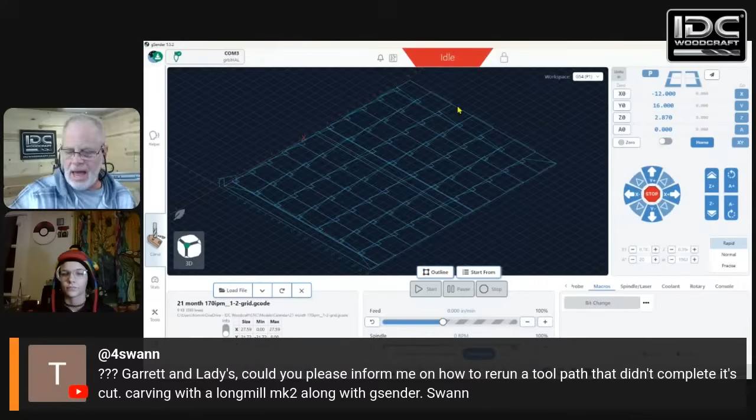It's not showing right, let's see if I can hit connect. Okay, reset. I'm just going to start the job and stop it if I can get the alarm to reset - I've been away so the machine's not... probably has to. Maybe I can get it. Anyway, if it kicks out on you, okay, there we go.

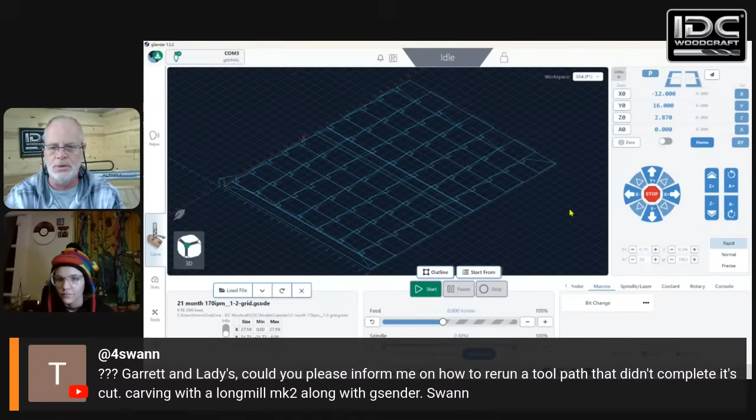If it kicks out on you, like a power drop or something like that, it's recording everything you're doing. There's this little button right above your start button that says 'start from.' You select that, and this window pops up saying the machine stopped at line number whatever, and it's going to say resume the job at line - it gives a recommendation about 10 lines before. You hit start from that line, and it'll turn the spindle on, position itself over that spot, come down, and start resuming from that line. It's a really cool feature in the GSender control software. So that's how you do it.

Okay Swan, I hope that helped you out. All right.

Tim, anyone out here have any experience with the WeCreate 45W? Good, bad? Would it just be a hobby, not a business machine?

Yeah, I don't know what WeCreate is. Maybe 45W, I guess that's 45 watt. I'm not sure if that's a machine or what, I have to look that up. Let's see, WeCreate 45W... let's see, that's a laser.

Okay, yeah, so anybody out there that works with a laser, maybe you can answer that question - is it a good laser, bad laser, what? Would it just be for a hobby or what? I can bring that up and take a quick look at it, and I can tell you my thoughts, or other people can share their thoughts on it. Actually, it looks like a fairly decent enclosed machine.

I have to move this to my other window here. Yeah, all right, there we go - this laser right here. So this looks like it's one of those... what was that other laser that was out there before? This is more of a home machine, I think. You've probably seen them a few years ago, I forget what it was called, but they were advertising it on the kitchen counter. It's a laser, which is not a good idea because it's going to burn and smoke - burns the wood.

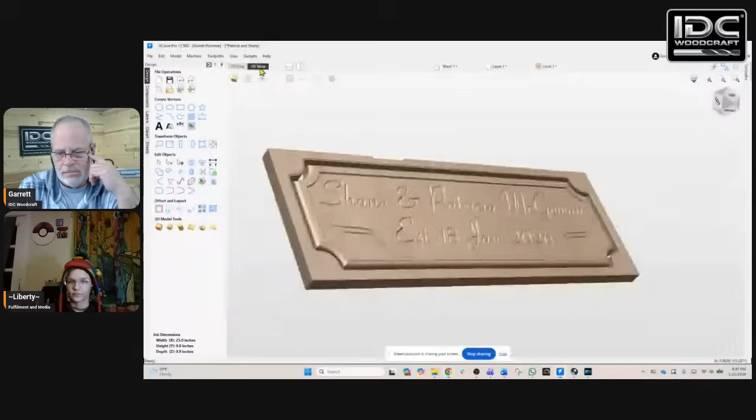This wedding project, let me show this thing right here. Everybody's here. So I started off with just, I'm going to make a wedding project, and what am I going to do? Okay, I'll just do an established sign. Shane and Patricia McGowan - that actually looks like a C, but it's a G with that font.

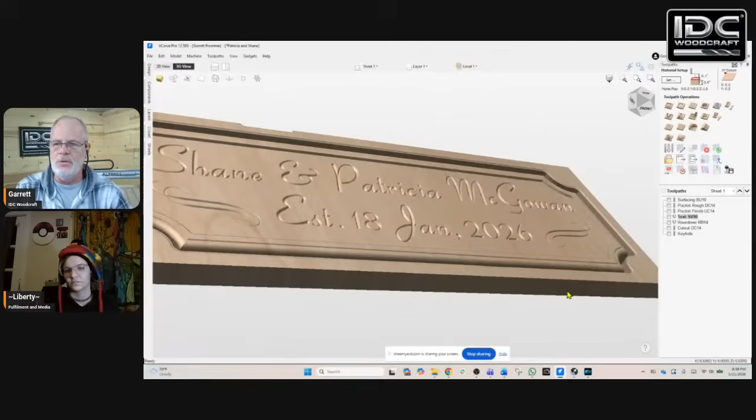And then I just went with the shape. It's such a basic shape that VECTRIC has, and I used a roundover bit as a beading toolpath. Didn't just round it over, I actually ran it down deeper, so it created that raised edge there. That actually gave it a little framing shot. I talk about how to do a beading cut like that in my video, how to use a roundover bit, so we'll link that because that adds a lot more accent to it.

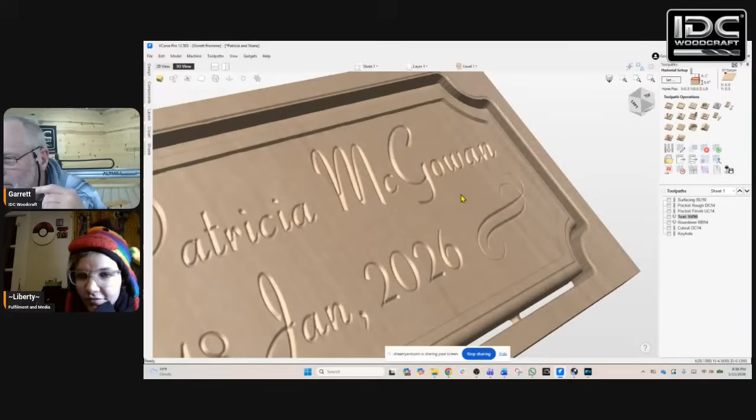All right, I love beading, I love the rounded bits. Yeah, the roundover bits, they're the ones that take your whole project and just step it up a notch, right? It adds all the elegance to it. I did it with this instead of a squared off board, and just ran a 1/8 roundover bit right around it and took care of it. Just round it out, it just takes it to a different level.

My worst is finding good wood to make my millions of ideas. Yep, right there with you, man. Yeah, well, just finding the right depth of cut for each design. Oh my goodness, yes, I'm in that struggle right now.

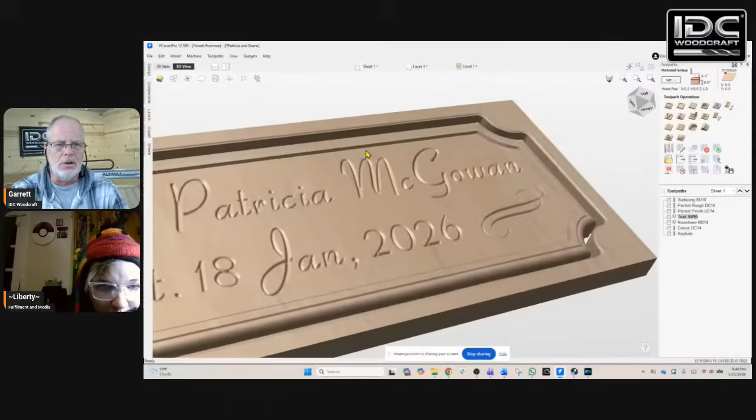Yeah, if you go too far you can actually make a project look bad if you go too deep in some things. That was the case with this project. It was like, how deep do I go? And that's what I like about the rendering, because then I can just kind of look at it and see what it's going to look like, and then I try to picture it in the real world in my head.

And then I have a love-hate relationship with the rendering, because right now it's not changing no matter what I do, and I want it to change, or I want to not see it so I can ignore the issue until it's carved out. I'm like, it's still there, it's still there. But it's great though, because I didn't have to carve it out a million times to see that.

Greg from STL dropped in. Hey Greg. Yeah, Ellen said she has a lot of projects waiting in line. Yep, and you can't make them fast enough.

No, that's why me and Adam are setting out a schedule, like okay, this one's going to be this size of a project, this one's going to be this size of a project. How can we kind of spread out the bigger ones, the longer ones, that kind of thing? I had to dial it back. I said okay, I'm going to make very few personal projects and just do it for videos, because that was locking me up too.

Mark said it before, project paralysis. We'll have to start that as a legal medical term in CNC. We'll call it project paralysis dysfunction, or what, disorder? Project paralysis disorder.

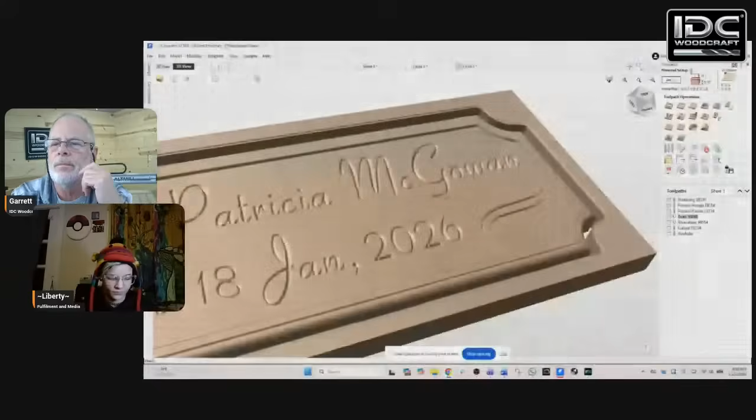So let me bring up VECTRIC. I'm going to open up a new window, a new VECTRIC. Just give me a second while I open this one up. Okay, wait a minute, where are you? There it is, okay, it's on my other screen.

All right, so I'm just going to set up a quick project here. First of all, when it comes to the IDC Woodcraft, every keyhole bit, you've got to know the dimensions of the keyhole bit or have the data provided to you. So first, let me show you what a keyhole bit is. We're going to go to the IDC Woodcraft website for those that don't know.

Okay, come on, open up. There we go. So a keyhole bit makes these kind of slots for you to hang your projects on, or so you can hang them on the wall. The keyhole bit has that shape where it basically drills down on the part and then cuts across. It's a two diameter cutting tool. So what's important is to know the height of the big diameter and the depth you're going to go in the small diameter.

So with the IDC Woodcraft tool, this one here, the way you set that up is, I'm just going to draw a line. We're going to start a line. Let's just say we're going to put my keyhole right in the middle of the project here. I'm going to click the start button, start that line. I'm going to come over to whatever distance I want it. If I want it 2 inches, I'll type in 2 and enter. And now I've, oops, didn't do it. Let me get that again. 2, enter. What's the matter with you?

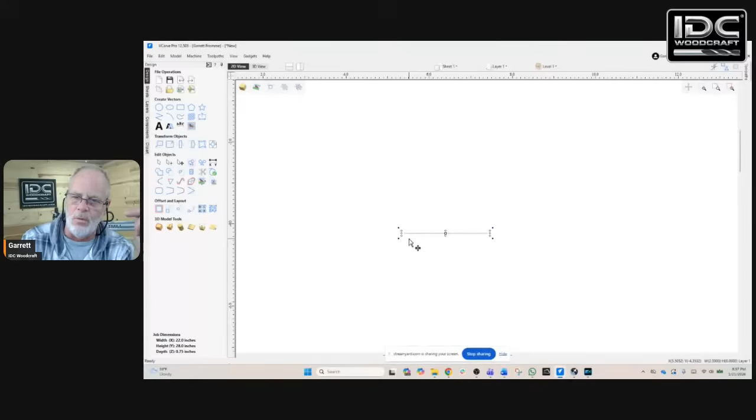It's not taking it. All right, I'll just click. First I want to find out why it's not doing that. I'm going to go back. Oh, I must not have that thing turned on. Okay, so I'm going to go 2 and enter. So there we go. Then what you're going to do is double back that line to the start point. So I click right there, and then I can escape. And what that is, you have a line that's starting in one spot, moves over to the other spot, and then comes back to that spot.

And then in the database, let's go find the database. Actually, I'm going to have to change something a little bit on that. So I got it set up as an end mill, but I might change it to a form tool. But for now, I'm going to leave it as an end mill. Right now, the IDC Woodcraft keyhole bit, the pass depth is set in the database.

So the pass depth is 0.375 of an inch. Basically, all I have to do is open this up and say, okay, this is 0.375 of an inch. So I'm going to select that bit, I'm going to do a profile toolpath. I've selected that, and the first thing I'm going to do is set my start depth to whatever it is, it's 0. Then my cut depth is going to be 0.375. So basically it says there's one pass right there. And what that's doing is telling me, okay, that's the depth we're going, the full depth of that keyhole bit, which is what you want to do.

And then you make sure you're on the line, and it's going to use the rest of the data, which is 30 inches per minute. It's going to come all the way down, then move across and come back out. So it's actually quick and easy, but you do it in a profile toolpath and set your depth to that 0.375, or use the database. It's 30 inches per minute, and you'll be set up that way. So it's a good question. I do have a video on a keyhole bit, so it's an older video.

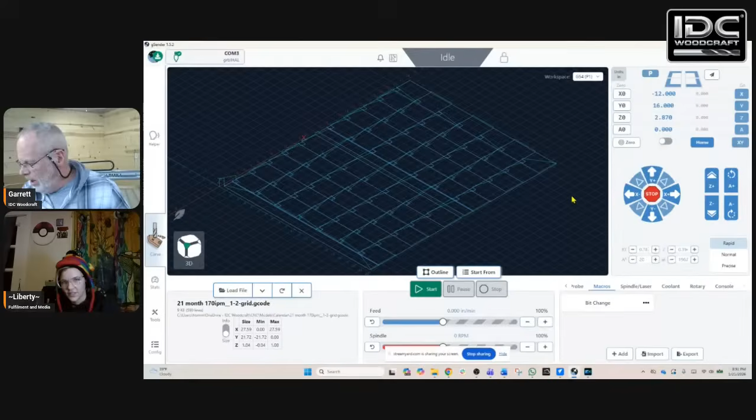Next, how do you use the macro button in GSender? Oh boy, I love the macro. That's probably another one people sometimes get hung up on, what does macro mean? We'll do a couple more and then we'll have to bug out, I figured we could try and finish these last two. Macro is basically a couple of short programs you create that can do whatever you want outside of its normal running.

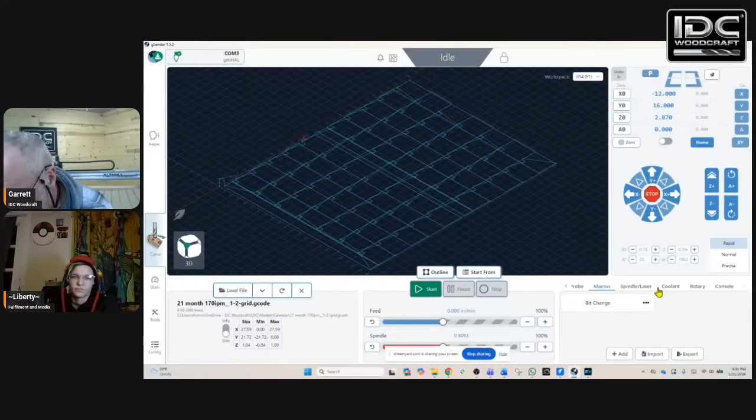This macro I have right here in GSender, it's got tabs in the lower right corner: probe, macro, spindle, coolant, rotary, console. Under the macro tab there's one called bit change. Let me move things out of the way so you guys can see my machine in the background. When I hit that, it brings the spindle up to the front of the machine in the middle.

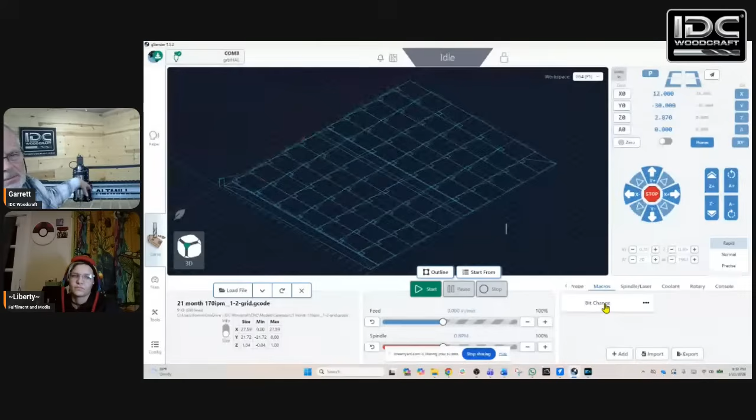That macro brings it to a very specific location so I can change my CNC router bit. I'm going to go into the macro - this is the name I've given it, bit change, and I've plugged in the code that will bring the machine up to this location always. If you have an Alt Mill, I can give you this code.

I'm going to copy it and put it in a Word document so you can see it. Control V, there we go. That's the code I put in there, okay? I want to be very specific about this because you'll do this all the time.

So it's G53, Z, 0, Z0, G20. What I'm doing is telling it to reference the home position of the machine, bringing the spindle up all the way to the home position, and doing this in inches. Then the G53 again references home, and it moves from the home position X24 and Y minus 46 - using decimal points here too - and that brings it up. So the purpose of the macro is to write little programs so you can tell your machine to do different things.

I wonder what other people do. Let's see, Mark named his bit change location 'park.' The bit change one is probably going to be the most common one you'll use.